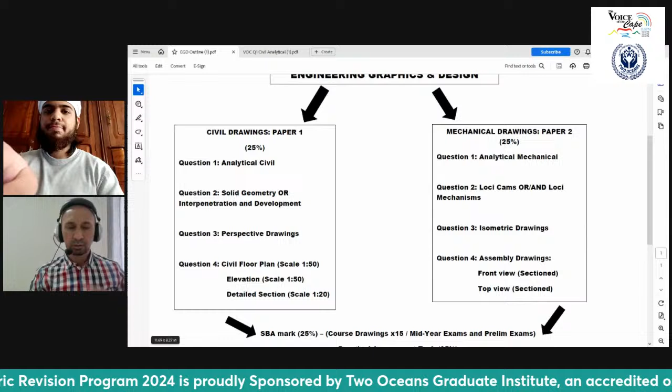Assalamu alaikum, and greetings to all our listeners, particularly the grade 12 learners of 2024. This is the continuation of a series of analyses of different questions from the Engineering Graphics and Design papers, which we are going to do over the next couple of weeks leading up to the final examination. So just to look at where we are at the moment.

Last week, I gave a very detailed analysis of what Engineering Graphics and Design papers are like, and we discussed question number 1, which is the analytical civil. Remember, for the next couple of weeks, we are busy with paper 1, and the analytical civil is part of paper 1. This week, however, we're moving on to question number 2.

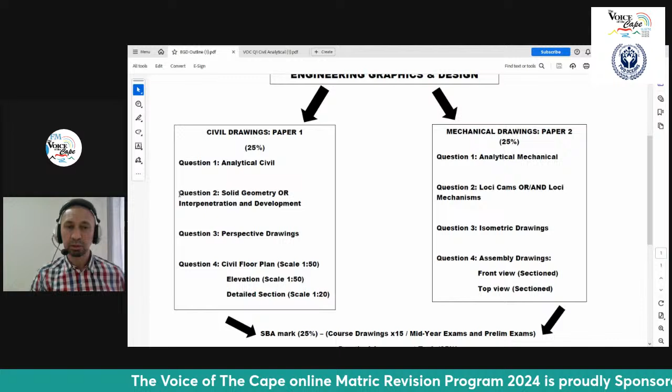But just before I get there, I want to touch on the last question of question number 1, which we did not finish. The bulk of this presentation today will be about question number 2. And remember, grade 12s, question number 2 can either be asked as a solid geometry or alternatively an interpenetration and development drawing. They will definitely not ask both, so you have to prepare for both to ensure that you are covered.

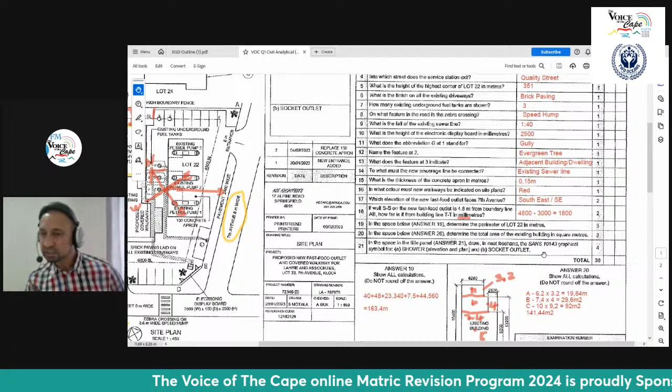Last week I worked out all the calculations of the perimeter and the area, and it was just this particular question, number 21. In the title panel, this is always the last question. You need to draw freehand the SANS 10143 graphical symbols for a shower, both the elevation and the plan, and also a socket outlet. Just to show you what those symbols are like, I want to change to my pen.

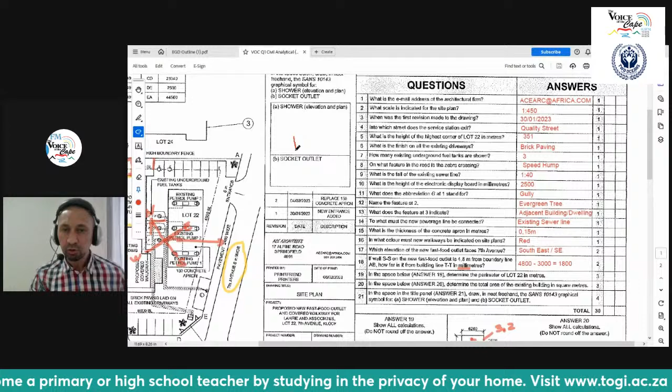The first one is a shower. The plan view of a shower is basically a square box with a little trap, which is a little circle. In any of the corners you can put that circle, and then you have the front view, or the elevation as we call it in civil, lining up. It has to be freehand because you actually get a mark for drawing it freehand. And then for the wall socket, you draw a semicircle, and then a line going straight up like that.

That is a basic wall socket. You do, however, get a switched wall socket where there's an extension of another line here and one down, but this particular one is the drawing and the symbol for the socket outlet according to SANS 10143.

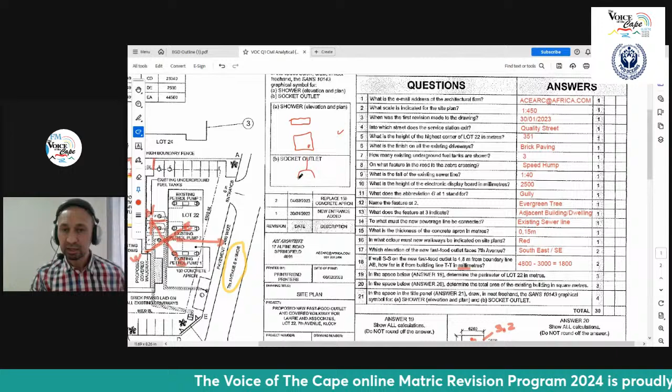Remember, if you do add a line here, the line cannot just be covering that section over there, because we are going to deduct and list that as an extra feature. It has to extend and protrude beyond that semicircle that you see there, that it's basically seen as the wall which you are drawing it against. Okay, so that basically covers last week's question number 1.

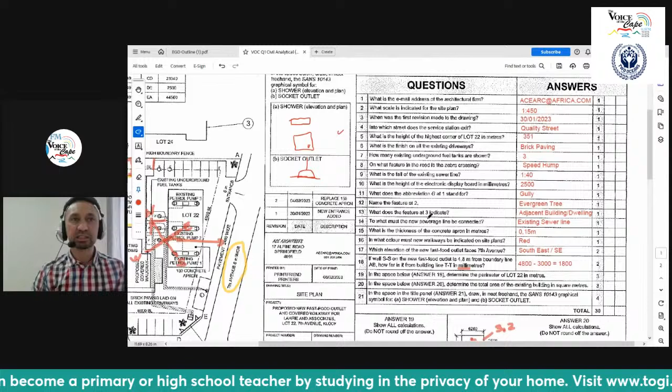So immediately I'm going to stop this here and I'm going to share my screen with the activity that has been prepared for this week. So let's just go there. So I'm going to look at a video which is the grade 12 paper 1 question 2 solid geometry, and I'm going to talk you through this video. I hope it's popping up now and that you can see it very clearly.

So just before we start, we have to analyze a little bit what is going on in this video, and I'm just going to pause that there and just read you the information here. And this comes from, if I'm not mistaken, the 2020 Matric paper, November 2020. So if you can find this paper on the internet, the DBE WCED website, download it, and you can do it as I'm going to explain it in this video.

So what it says here in the instruction, and it's very important for you to read the instructions. What is given is the front view, and that is the front view that you see here on top. And you see the top view, which is at the bottom here, of a right regular hexagonal pyramid, and there's the pyramid, a hexagon in shape.

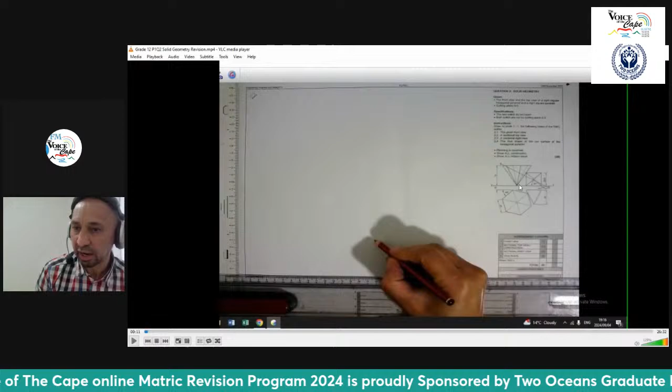And then you also see a right square pyramid, which is basically on its flat side here, pointing towards us, if you look at that front view, and that is what it looks like from the top. So the right square pyramid, both are pyramids, and the hexagonal one that you will see there. So those are given to you. And of course, also there's a cutting plane SS that runs through both.

The specifications are that the two solids are not touching. So it looks like it's touching there, but if you look at the top view, there's a little bit of a gap in between here. So both solids are not touching each other, and both solids are cut by the plane SS.

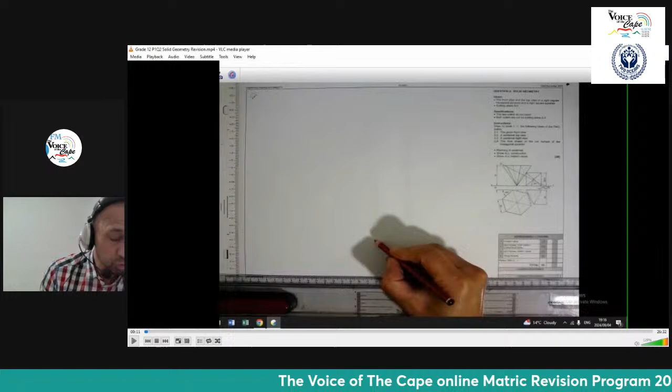The instructions are that you need to draw to a scale of 1:1 the following views of the two solids, and it's listed here 2.1, which is the given front view. So that view that's given to you there, you will have to draw that. But of course, you are going to start with your 2.2, which is your sectional top view, which is that over here. And then you are going to proceed to a right view, which is going to be on your left-hand side, because of this paper being in first angle orthographic projection.

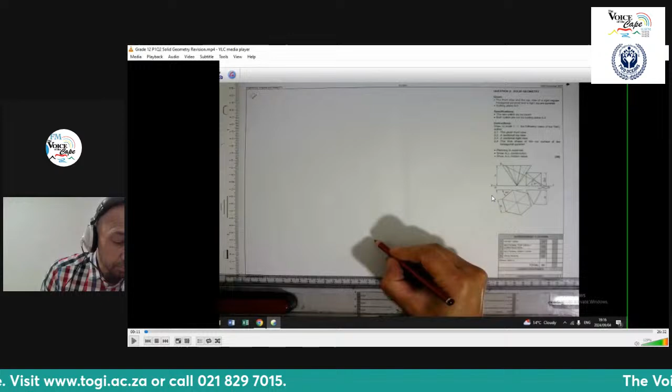And then, of course, 2.4, the true shape of the cut surface of the hexagonal pyramid. So only the hexagonal pyramid true shape you need to draw. What is very important to note is that planning here is essential: where you draw, where you start, so that you utilize all the blank space that you need to be able to complete the drawing. Then, of course, also construction lines are important, and all the hidden detail needs to be shown as well. All right, let's proceed and see where we are going to start.

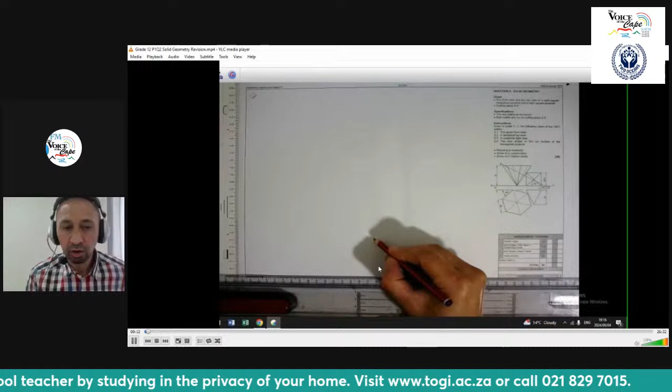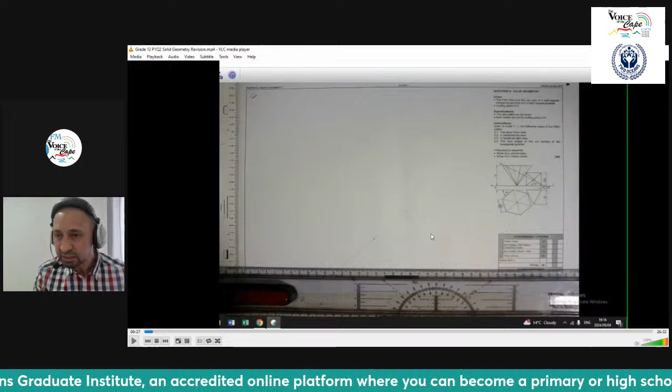So I have indicated a dot here, and it's towards the bottom of the page in the middle, and you can see that I've run my drawing across here to see what angle actually fits. And I have seen that the 45-degree set square actually fits that line, because there it states 45, and I've drawn this particular line that you will see here from my center point, which I've indicated.

And now I am going to look at the dimension of one side, and the dimension of that one side is 45 millimeters. And that also now becomes the radius of the circle which I'm going to draw. So if you are drawing this from a center point, you need to take one side and make that the radius of the faint circle, which is part of your construction. And you will see me drawing that faint construction over there.

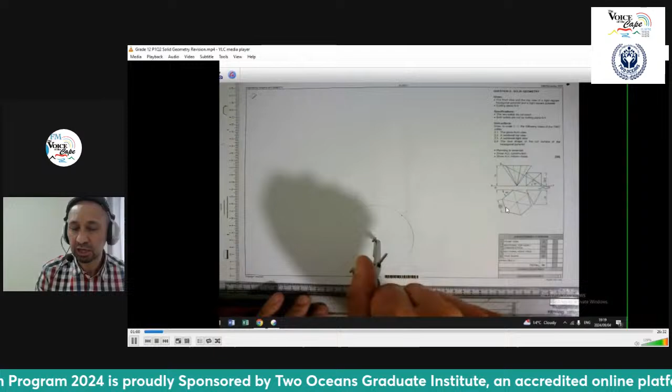And I will also identify the 2 points on the circumference of my circle. I maintain that 45 and arc it both sides of those 2 points. As you can see, it unfolds in my video. And by doing so, I'm actually creating the 6 different sides of 45.

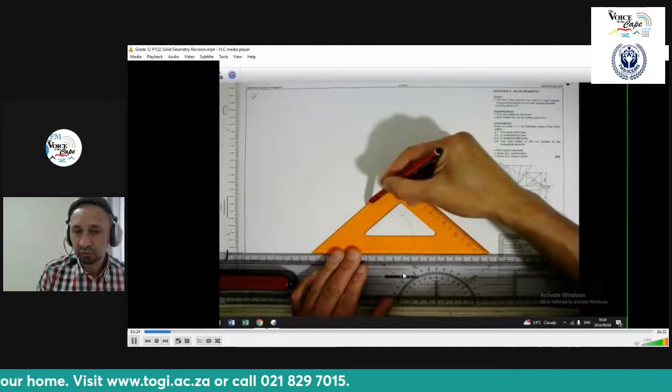So I'm going to connect the different points on my circumference. The first 2 would be those that are at angles 45, and then I can simply connect the other 4 angles by using my straight edge. Any straight edge would be your set square or your T-square as well. And there I have completed basically my hexagonal base part of my pyramid.

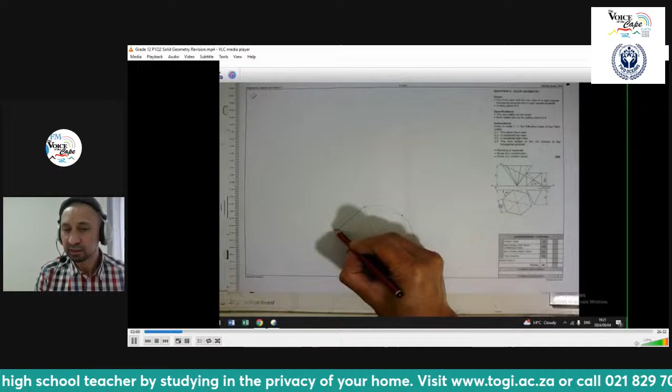I will project the lines across so that you can see that those are the lines forming my apex. It's upside down, as you can see here. That is why we have dashed lines in the middle here. What is very important, which you have to note, I've labeled my points, and you're going to need this: 1, 2, 3, 4, 5, 6. And you can start anywhere. It doesn't really matter where you start. I've started at that specific point. You can start at any point and run it either clockwise or anti-clockwise.

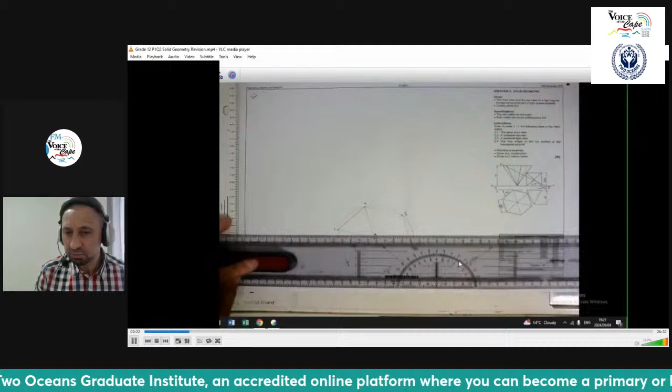So these points are all going to go up. But just before I draw it up, I'm going to have my XY line, which is going to be from this point here, which you see in your given. And that XY line will be 15 millimeters as I've measured in the instructions. Now that line is my XY line, right? That's the separation between the different views. And that is going to be the line that my apex is going to be situated on.

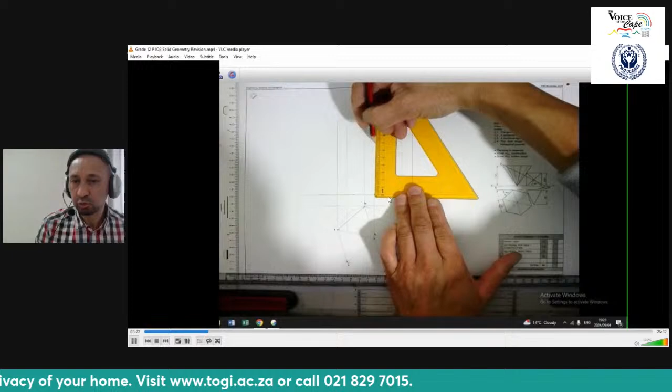I now will have to project all my points from 1 to 6, including my apex, up, right? And that is how I'm going to formulate my front view of my upside down hexagonal pyramid. Okay, and I will identify my points. That is the apex, which is right at the bottom on my XY line, and I have a height of 70 millimeters, which I'm going to measure off from my apex, and I'm going to draw that line there, and that line becomes my base. So that's why I'm going to darken that line.

And I will also indicate my different points. My point on the side here will be number 1. That will be number 2. That will be number 6. Then we have number 3. There will be number 5. And then, of course, number 4 will be there. And then you obviously know that all these points actually run to my apex as I'm projecting that. And you can take each one and run it to your apex.

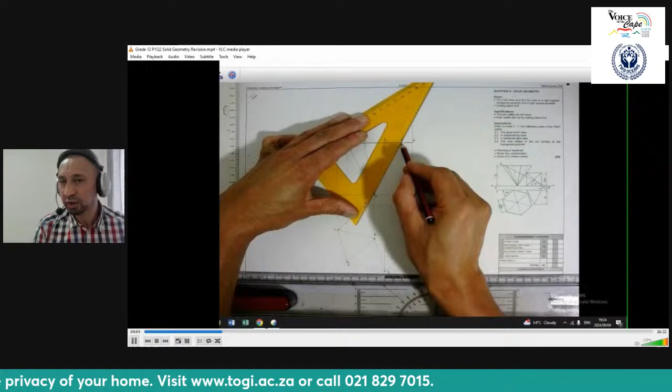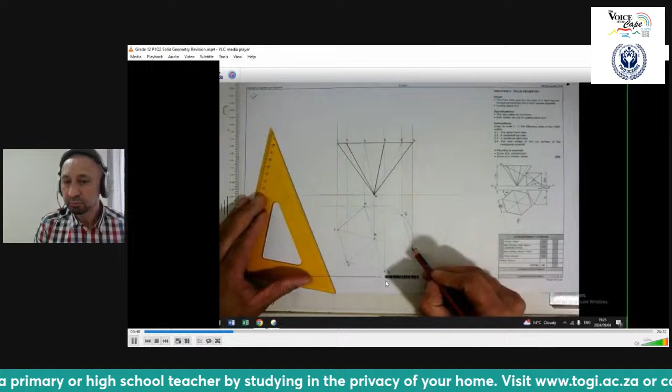Remember, I'm keeping it just faint because some lines will be dark, which can be seen, and others will be dashed. So I'm viewing this from my arrow here, which means that 1, 2, 3, and 4 will all be dark lines, and number 6 and number 5 will be dashed. The reason for that is because those are at the back of my hexagonal pyramid, as I'm viewing it from this point here where my arrow is indicated. So these 2, 6 and 5, will be dashed.

Nice short little dashes will allow you to get the mark there, as well as this one that you will see me drawing in the video right now. You will also pick up that I'm actually drawing this dark. What is my reason for that?

The tip that I want to leave you with today is that the view that has the cutting plane in it, or the cutting line in it, is the view that you can draw dark immediately. And this is a tip. The reason for that is nothing is going to happen to that view. That view is just an instruction and indication of where it's cut. So you can darken everything in this view.

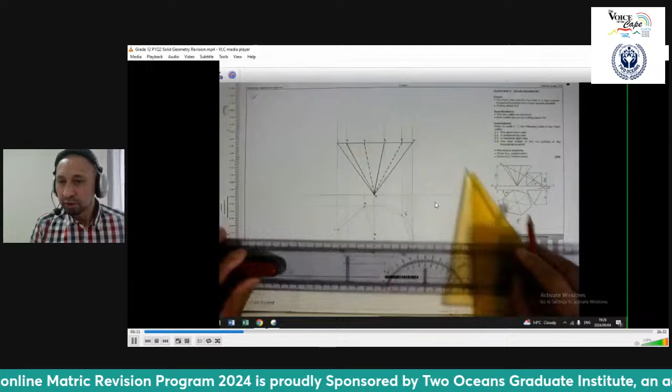These views, unfortunately, have to wait a bit because they have an impact from the cutting plane that will be in this particular view, both your top and your right view on your left hand side. So what I'm going to do now, I'm going to continue with this for space planning onto my right view on my left hand side.

But before I can do that, I'm going to create an XY line any distance away, or you can have it as 15 as well. But I've used any distance, not too far. So those are both XY lines, one perpendicular to the other one. Wherever they cross, you are going to draw a 45-degree line down, right? And that is for the projection purposes of my top view onto my right view on my left-hand side.

So now I will project all my different points, and you can start anywhere. I've used the last point at the bottom just to see where that fits in, and it just makes it onto my page slightly over the border. You will not lose marks if it goes over the border. And here you will see me projecting all 6 points from 1 to number 6, including apex, onto my 45.

And then what happens? It goes up, right? Because in that space, you will find my right view will now formulate from the different lines that I'm projecting. So as I'm drawing my lines up, I have my top here, which is my base, and I have my bottom here, which is going to be my apex. So I've just zoomed in a little bit so that you can see a bit more clearly how this unfolds.

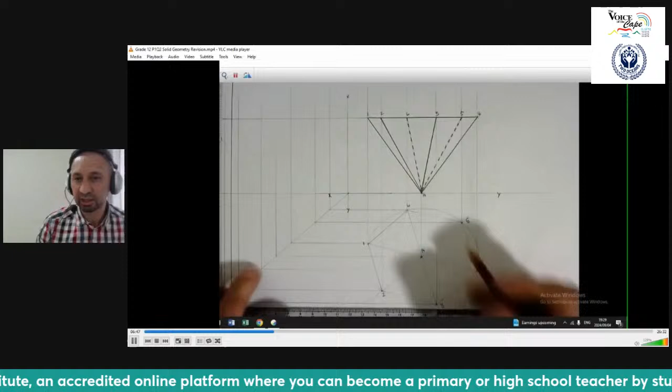I'm first going to take my apex, dot it, and you can see it's all about coordination of points. And I just want to stop. If you take this apex point and you trace it onto my 45 and up, it lines up with where my A point actually is in my front view. And the same will apply with all the different points. You will see as I trace them, I will label them as well.

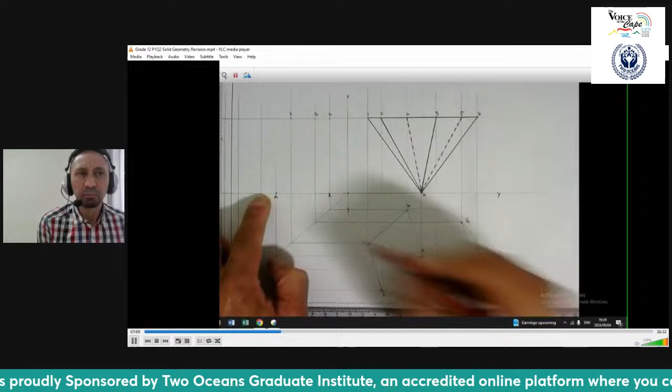And it's important for you in the exam to rather use numbers or letters, because it is a way of just ensuring that you understand what you're doing, and it will help you to get the actual cut that you need. So I've done all my points, and now I'm going to once again let them all run to my apex from 1 to number 6. I draw them all faintly first because I need to cut them eventually when I put in my cutting line in my front view. So there I've drawn that. Both of these views now are in faint format.

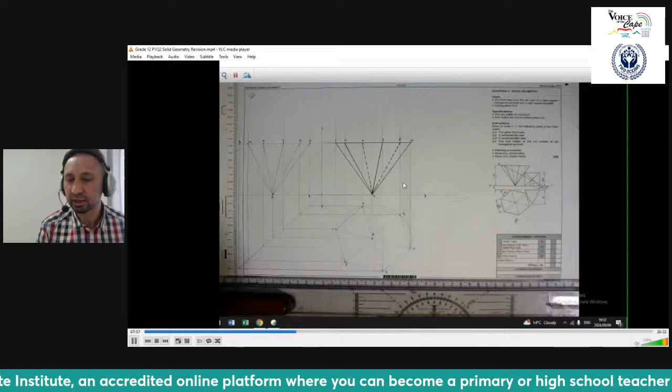Now I'm going to go to my second, which is my square pyramid. And I'm going to put in my square pyramid, and I'm only going to focus on my square pyramid now. And my square pyramid, I have to go up by 45. Remember, all sides of a square are the same. So I've got to go up 45. I'm going to draw a faint line. And because I know it is touching, that is my guide point there, where it just links up with my hexagonal pyramid. I bring that down.

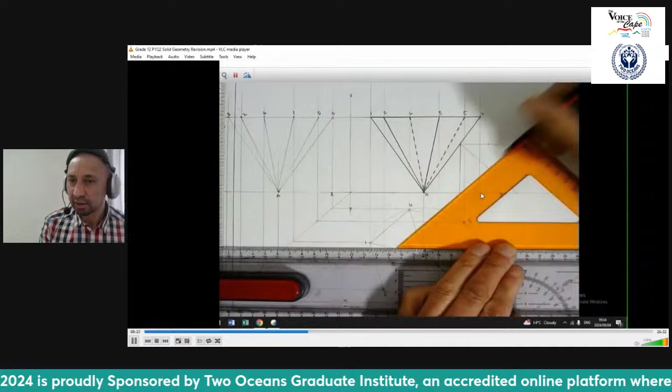That's my one side. I'm going to cross this over as it is in my given view, that way, and the other way, which is my crossovers forming my apex. And because it's in my front view, as I've mentioned, you can darken it because this view doesn't contain the cutting plane. So I'm darkening that, nice and easy, clear, concise lines, and crossing it over for my apex. So there are my inclines. We'll see there, that shape faces us now.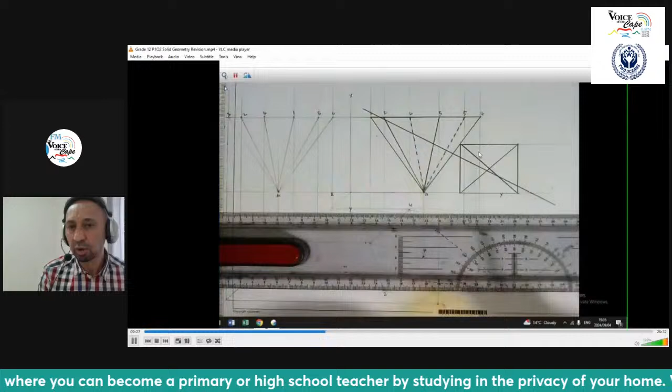And now, to put in my cutting plane SS, I'm going to measure 10 millimeters away from this edge as per instruction, dot it, and then use an angle of 30 degrees as per my instruction from that 10 dot or the 10 point, and run a nice dark line through that. Once I've done that, I will label it as SS, because you do, however, get marks for putting in the cutting line and labeling it correctly.

Now you will see, learners, that this actually cuts perfectly at an incline through the hexagonal pyramid and the square pyramid as well. And for you to be able to see what the shape looks like here is sort of the higher order part of this question. Let's proceed.

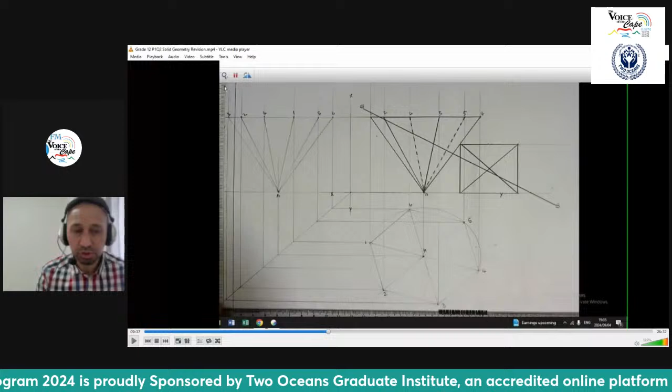So we're first going to cut one at a time. So I'm first going to do my hexagon, and for this particular exercise, I'm using a red color pencil, but remember, pens are not allowed in engineering graphics and design. Pens are not allowed. You're not allowed to use a pen, but you may use a clutch pencil with color.

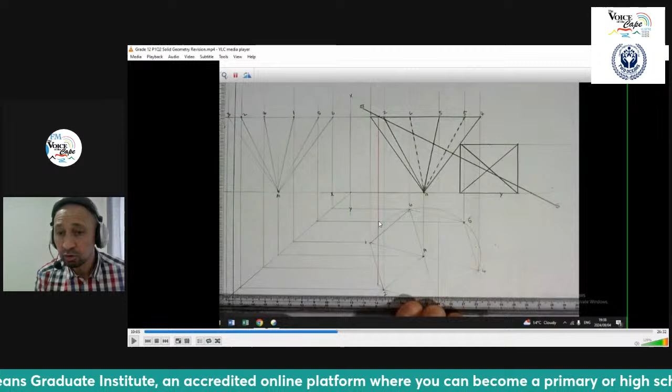Now, and I just want to point out this, everywhere the cutting plane cuts on these edges that go up, or come down, should I say, right? That is where I dot it, and I'm projecting with my red color pencil those down onto this top view. Let's see how it goes.

Right, so I've done this one here, and you will find significantly that that one cuts through the base. Now, once it cuts through the base, you must know that it cuts through 2 points always, like I've indicated there. Let's proceed. And then I cut through that little nip of a line there on 2. So I will bring my line down. Wherever 2 is, this is 2 to my apex, and I will dot that exactly there, very close to the end. That way it's cut.

Right? And then we will move to number 6. It cuts on number 6. And you will see that that's 6 to A in your top view. Wherever it crosses this line, 6 to A, that is where you're going to plot your point. And then we're going to go to number 3. Number 3 is cut on that point there. I bring it down. There's my 3 to A, and I plot my point there.

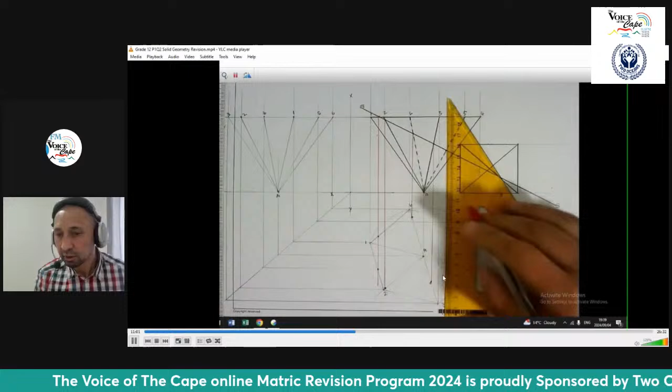Then I'm going to go 5 to A, and 5 to A will be on that specific point here, you will see. And finally, the last one is 4 to A. 4 to apex will be just there. So that is why your numbers are important, so that you know where to plot your points.

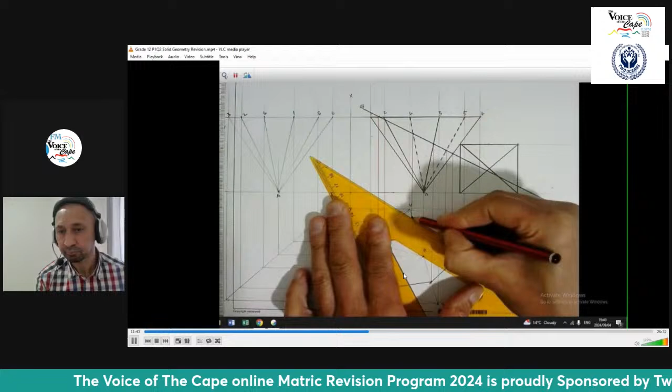And now that I have that, all I'm going to do is connect those in sort of an irregular shape. And that irregular shape is this part here. Now, that part has been cut, of which this has been removed. Right? So there I am just connecting that to formulate that shape that you see there.

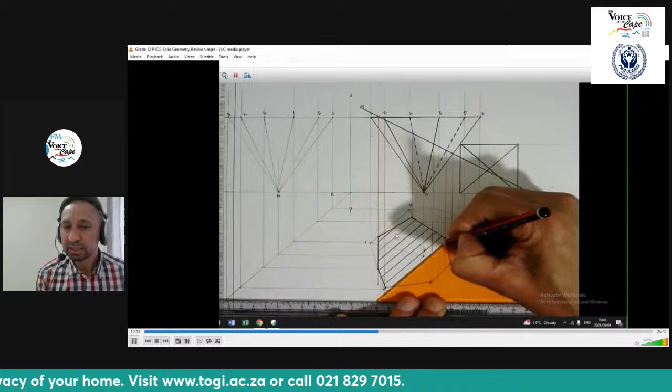And by means of showing the cut section, I am now going to take my set square and do my hatching or sectional lines at a particular angle. The angle can be 60, 30, or 45, doesn't really matter, just so long as it does not go parallel to any of the sides here, right? This one is slightly not parallel there, but that would suffice for that cut.

Now, when I say that part has been taken away, that little part still remains there, so that edge you're going to see still; that is the reason why I'm putting in that part over there. And then, of course, everything still runs down to my apex, which means they will be there but cannot be seen from the top. That is why I'm adding my dash lines, hidden detail lines is the proper name, from all my cut points to my apex. Because I'm viewing it from the top, I cannot see these corners, hence they are drawn dashed.

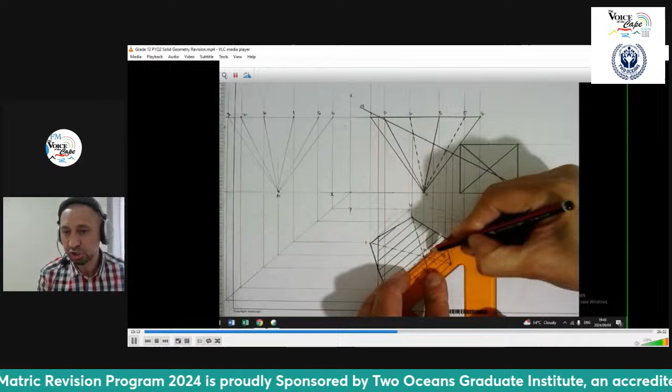Okay, so that completes that part there. I'm now going to do the cut immediately onto this one, and then I'm going to come back to that one over there. So now, in a similar fashion as I've done on my top view, I'm going to project all my cut points onto my right view on my left hand side.

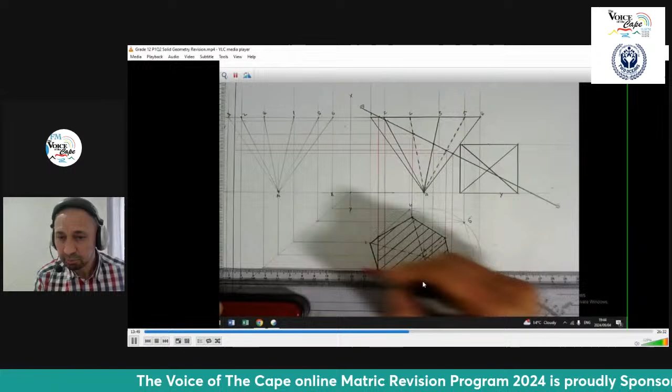So you will see I do number 4, number 5, number 3, number 6, number 2, and then I don't know where this is, right? Because it's somewhere here, but I'm going to take the two base points, and this is important, the 2 base points, I'm going to take onto my 45. It's still in red because I'm busy with my hexagonal pyramid, and there I'm bringing those 2 base points, and I just want to pause it right here.

My 2 base points, I don't know where I can find that down here if I just project it over. These ones I can find, but the key here is to ensure that you have the 2 base points here projected onto the 45, and you will have it there. And you will see that I start by drawing that dark first to identify that, okay, on my base. So that is my dark section there, which is that point over there.

And now I'm going to connect the other points. So 2 will connect with where 2 is. So this is 2. So I'm going to have a point plotted there. Right? There's my 2. That is where my 2 is. And you got to trace where it is and plot it. Then I'm going to go number 6. Number 6 is way on this side here. That's where number 6 is. Then that is number 3. Number 3 is going to connect with that 3 over there.

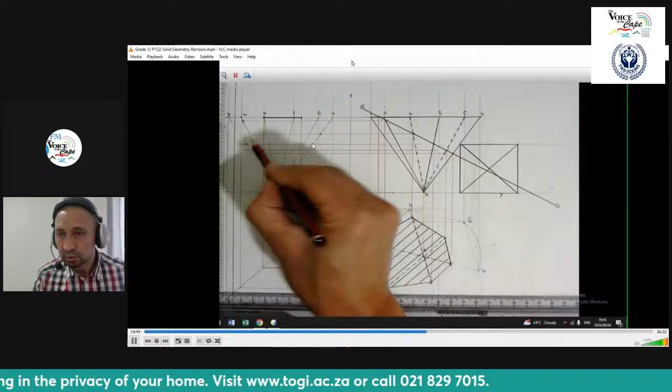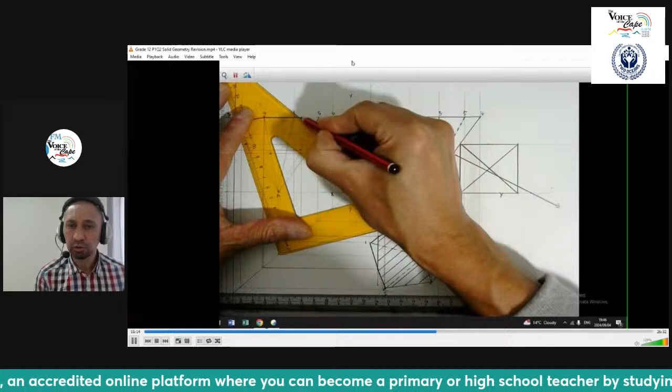Number 5 is going to be where number 5 is right here. And number 6, which is the last one, which is right at that point over there. Sorry, not number 6, number 4. That is number 4 that I'm busy with here. And then I just, once again, connect all my points so that it forms that irregular shape, which means that that is, in fact, the cut section. Okay, so there I will do my forming of my cut section by connecting all my points in that irregular shape that you will see there.

And now once you have completed that, in the same way that we've done the cut hatching, you are going to take your set square and your T-square and do a hatching. And here I can choose any type of slant. In this case, I have chosen the 60 degrees on my set square to be able to do the hatching presentation of the cut section in that view there. Nice even spacings that you have so that you can get the full mark for that.

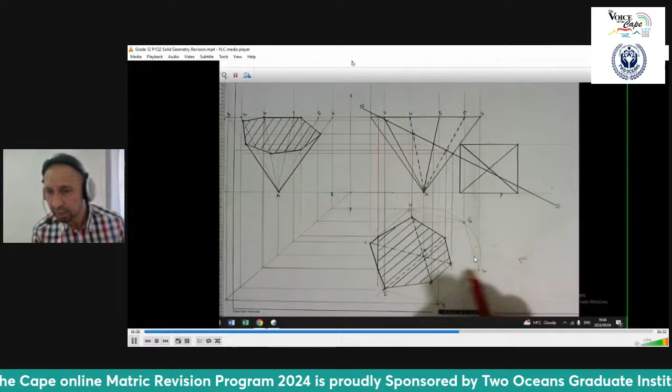And now I'm going to ask, if I remove that and I view it from this side, this bottom part will still be there. So I have to draw that in. All these points will then go down. But keep in mind, that point will be dark. Number 6 will be dark. All right. Number 5 will be dark as well. And number 4, because I'm viewing it from this side, number 4 and 5 will be dark. Sorry, number 4 will be dark, as I can see there.

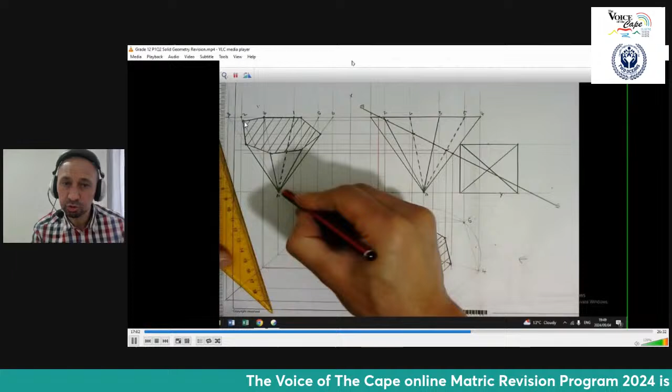I view it from this side. Number 5 here will be dark. I view it from that side. But number 1 here will be dashed because I can't see it. Right? It's on the opposite side. I know the corner is there, but I can't see it. And then also number 2 is on the opposite side. Number 2 will be dashed as well, which indicates that the corner is there, but I am unable to see it. And that's why it's dashed.

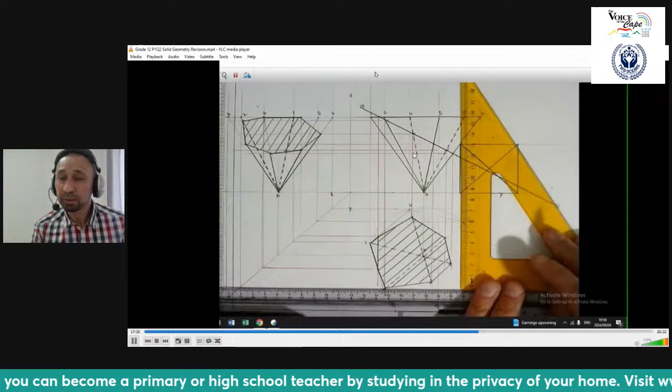Right, so that concludes that part of my drawing, which is basically just focusing on the hexagonal pyramid. Right, now I'm going to draw my attention to the square pyramid, and I project these lines down as it is in my given. It's in line with that point over there. That's the back part. And then it slants to my front or slants to my apex.

So I'm going to darken this line first, which is my back point. And I know the front part is going to be 50 millimeters according to the instruction, and there I'm drawing in my 50, nice and faint. Right, I'm not going to draw dark yet, as there's a cutting line that goes through it, so I need to find the cutting line or the cut section first. So the back section you will probably draw dark, but that point there will be now identified on this line here, and you will see me drawing in green.

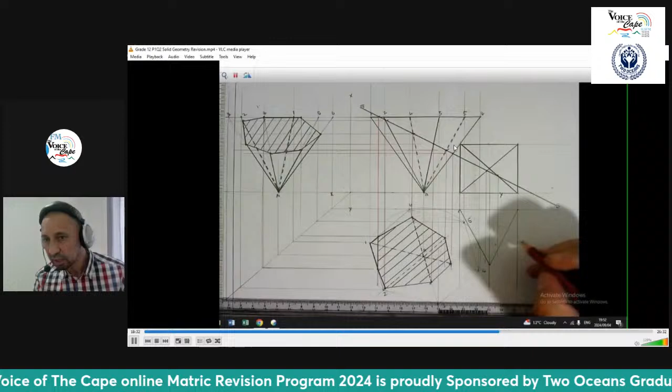So these points that cross here, that is where the cut section is, right? So it cuts from this side to that point here, to that point, to that side again. So I've identified those 2 points, as you can see, and now I'm going to darken all the section till that point, bring it slanted across, and reverse it to that point again. There you will see the slant up until that section there.

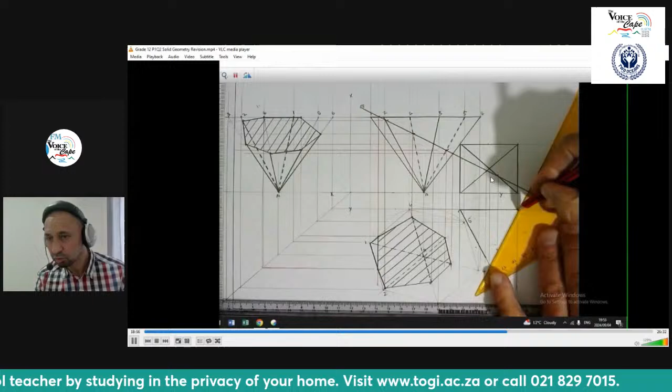That one goes onto that point over there. That's where it cuts, and then it just goes across. And that is the cut section of this square pyramid. Now I'm going to hatch a different type of hatching, opposite direction perhaps this time around, to ensure that you show that these are 2 different things or different shapes that we are busy with.

Nice even spacing, evenly apart. What I need to do is to check. If I take that away, that's my cut section. What remains, right? The tip part is not there anymore, so that just remains faint. That is the only part that you will be able to see.

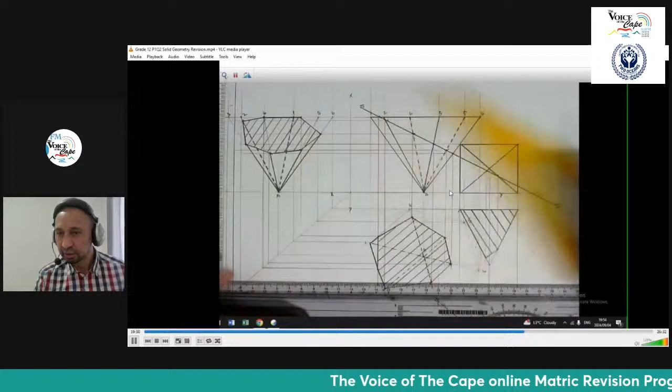Now I project over to my right view on my left-hand side, and I take the whole shape, the front part, the original apex part, take that up, and it connects with this apex coming across here. So I first work with the original. So now I have to identify where is that according to my lines. So the back part is here, and the height is there given to you.

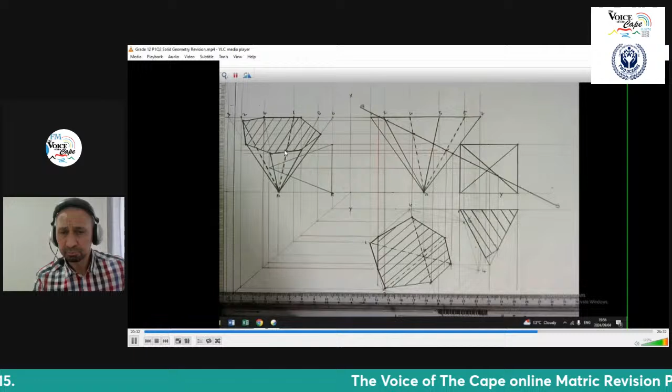That's my height, right? And then I'm just faintly going to draw in that back part there of my square pyramid, and then it slants to my apex, which I've identified according to the top and the front view. Faintly I slant that. So this is going to take preference in viewing over my hexagonal pyramid, so I will have to erase that part later, but I just want to show you where the cut section is done here if you view it from this side.

So if you project that point across, and that's at the back, so you're going to have to plot a point there, that's at the back. This is on the one slant, and you will see wherever it crosses on the one slant, there you're going to have a point, and this crosses on the other slant on the other side, but the same line, so you're going to find that point crossing there.

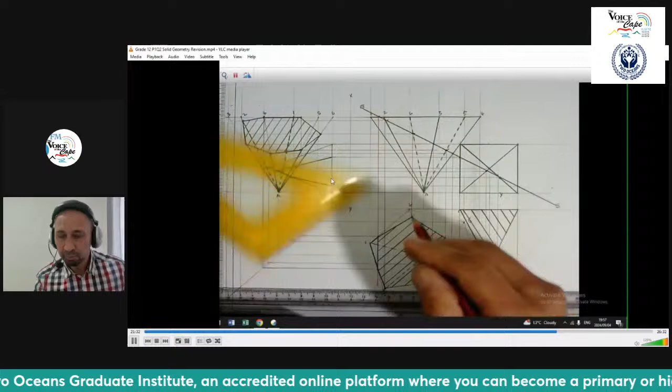Okay, so it's just a matter of line crossings, and then that will be at the back as well, which is here. So you have your 4 points, these 2 at the back and those 2 on the slants. So you're going to connect them. That one goes there, that one goes there, and that one slants till there, and then obviously the back part. So we only have the cut section now. Here's the cut section. That is where the cut takes place.

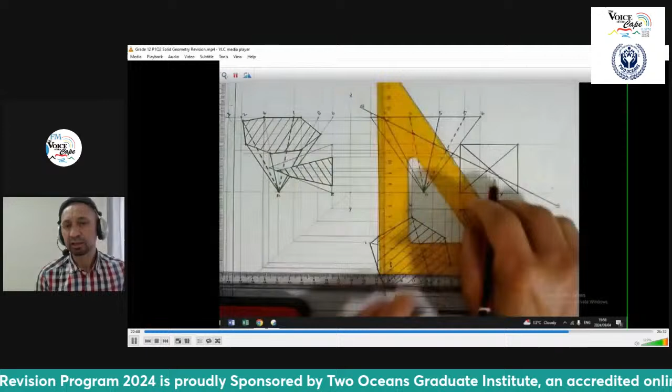You're going to hatch it again, evenly hatched lines going across. Right, you will see I have to erase that because this square pyramid takes preference, as I said, over the hexagonal one. And just to bring in those lines again, we have erased, and that falls behind. That's why you will see me erasing that part.

That is what's gone. What is remaining? That bottom part remains. So you are going to see that little part at the bottom there going to the apex still, which is this little section that you see there.

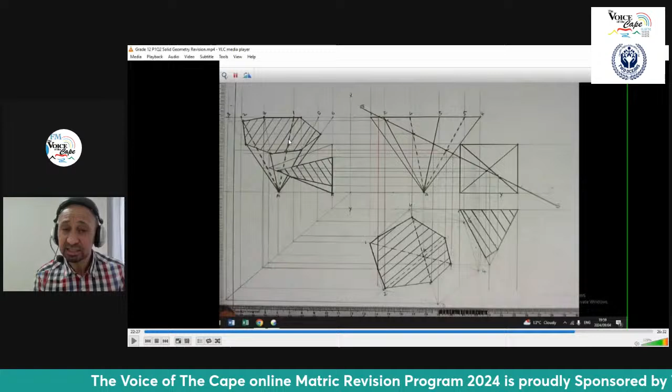And learners, if you look at that, you have now completed 2.1, 2.2, and 2.3. Both solids, which is your hexagonal pyramid cut in your top view, as well as in your right view on your left hand side, as well as the cut shown in your square pyramid, both in your top and your right view on your left hand side. And you can see strategically I've planned it according to my lines where I've done the cutting.

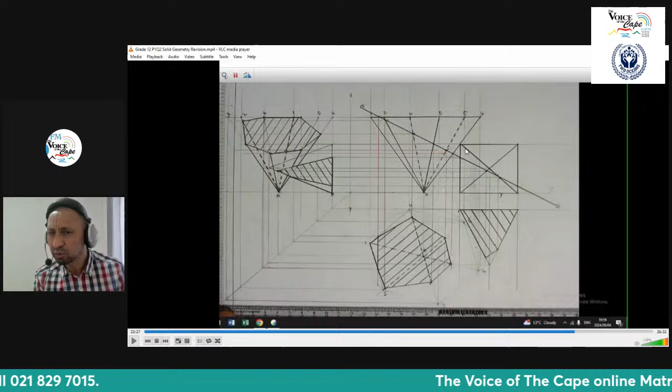Wherever it crossed, I plotted the point, I connected, I hatched. So it's very important for you to understand and for you to work with numbers. This was quite straightforward because I didn't use numbers here, because we only had 4 sides and it was just placed in a position where I could easily get the cut section. But it's a little bit more tricky when it comes to pentagonal shapes or hexagonal shapes. When it's upside down like this, I would advise grade 12s to use numbers or letters for easy plotting purposes.

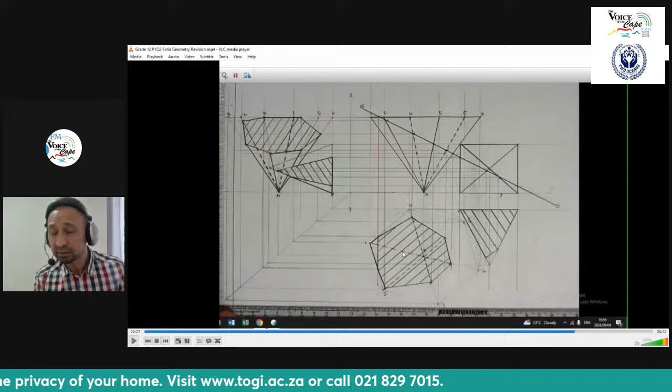Right. So the only thing that's left is for you to do 2.4, which is very quickly, and you will draw the true shape of the cut section. So this here is the cut section of the hexagonal pyramid, but you need to draw the true shape of that. And this is not the true shape. It's sort of on a slant. How do you draw the true shape?

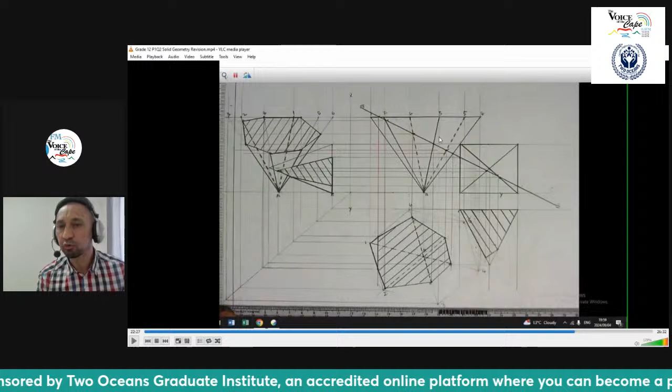You're going to find space here, up here, and there are 2 methods that you can use to draw the true shape. The one that I'm going to use is what we call the cone generator method, where you arc, but of course you can also draw lines at 90 degrees from this cut line. Let me show you. It doesn't matter which of the 2 methods you use. Both will be rewarded as marks in the exam. So let us see what happens next. You will find that you need blank space to be able to do the last part.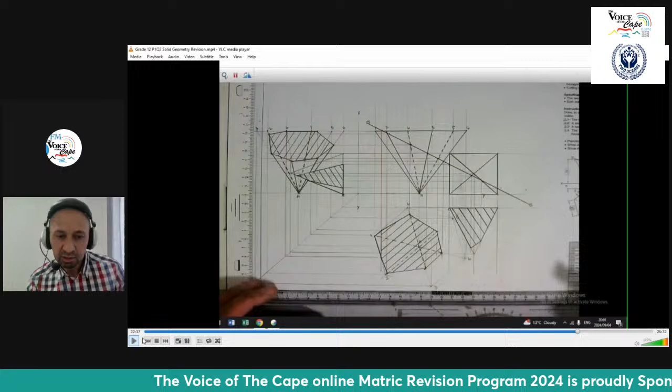And this is important. You are going to take this section here between that cut point there and where it stops here, and I want to just come back to what I did. You're literally going to take your line and put it up straight here. So these points are all going to be taken onto a straight line here. So I've drawn this line straight. That is the lowest point. I've drawn it straight, right? And that is this point over here.

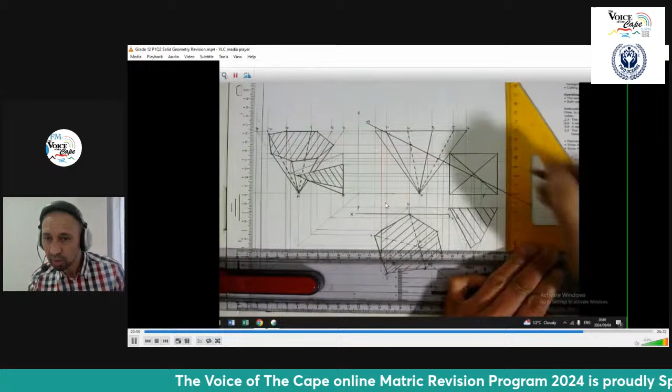And I've also drawn a line against the closest point here, which is my XY line. I've dropped it till there. And now I'm creating another XY line here. Now these 2 are speaking to one another. In fact, they are the same. Anywhere here, I'm going to draw this XY line, and I've dropped this XY line against the closest point, which is there. So, like I did with my pencil, I'm going to bring all these points up until this line over here.

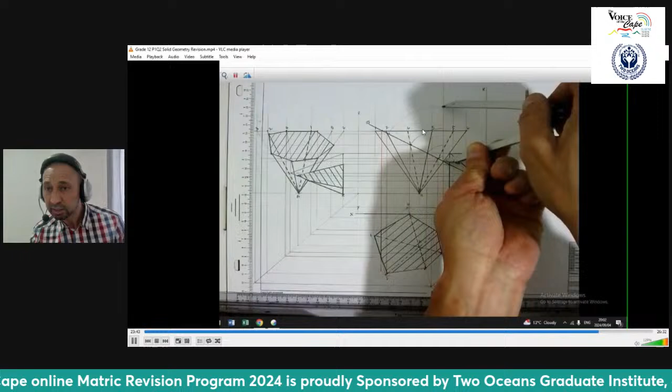And what do I do? I use my compass, and I go to the smallest one. My smallest distance, I just arc onto that point there. That is a point now. I go to the next one, which is number 3. I arc there. I go to number 6. I arc onto that line. And I go to number 2. I arc there. And then, of course, my base, I arc there. Now, I just want to stop there.

You will see I've taken this piece of line and drawn it straight up here. I've drawn this lowest point straight here because that point, which goes straight, is actually this point over here. If you trace it, you will see. And I brought all those points up onto this line, of which this point is there already. That's why there's no arc. So you will see it is number 4 that's existing on the line. Number 5 I brought by arcing. Number 3, number 6 I've brought by arcing. Number 2, and of course the base.

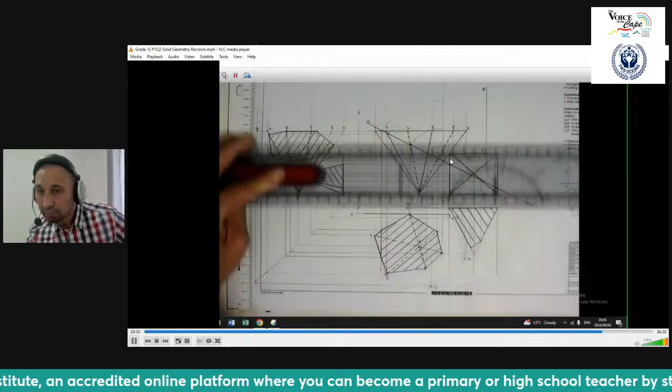And now what's going to happen is that I've extended this one already. I'm going to extend all these points now that way. All right, and that's all my numbers. This is the only point here that will have 2 plottings on one line. All these others will have 1 plotting. So what is it that I'm going to do? I'm going to measure down here and plot it that way.

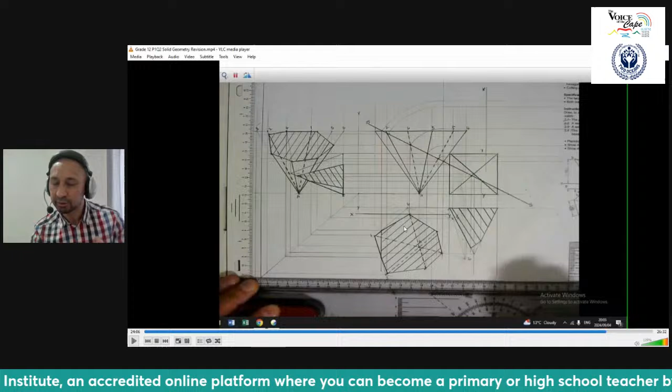So this 4 here, that's not 4, sorry. This 6 is my closest point. It's actually on the line. I can take this 6 and just make sure that I plot it on that point. And you will see the pattern that I'm following. I measure down and I use my compass and I arc it that way. So just watch the pattern, what unfolds in this drawing. I'm going to start with the closest point, which is number 6, and I'm going to follow and trace it.

Where's number 6? It's on the line because these two XY lines are the same. Then I'm going to go here to number 1. Right? Not number 1, but the cut section of my base. That's 2 points. So you'll see I arc it there and I go back here and I take the furthest point with my arcing. You can see there, furthest point. And I go back there from the same point I arc there. That's now those 2 points that you will have here and there.

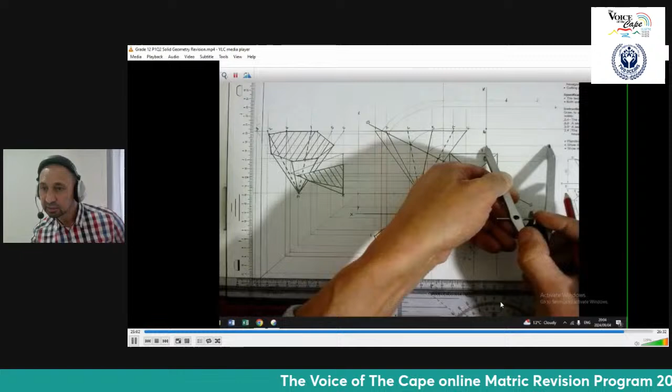Then I'm going to take this point, which is my furthest point, and I'm going to take it across and away from my XY line. So I measure away this side and I plot away that side. I take this point, I have that point already, number 6. That is my size, and I plot that size on that side. And then I go with this one over here. That is my size, and you can measure it as well. You don't have to do it like I do. You can measure it, and I'm just going to plot it where it is.

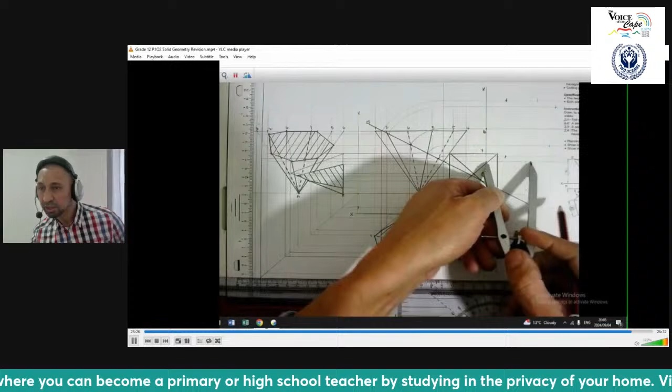And the last one is going to be this one over here, where you see I measure every time away from my XY line and then plot it away from my XY line there. And then all I have to do now is connect the points like I've done previously. And I start at a specific point and go right around connecting my points. And you will find significantly a hexagon has 6 corners, but here are 7 points. Why? Because the base has 2 points, making it 7, 1 extra one.

And there you have your true shape. That is your true shape indeed. And all you need to do is to find an angle for you to hatch that at a specific degrees. Doesn't matter which, 45, 30, or 60. And make sure that you complete it like that.

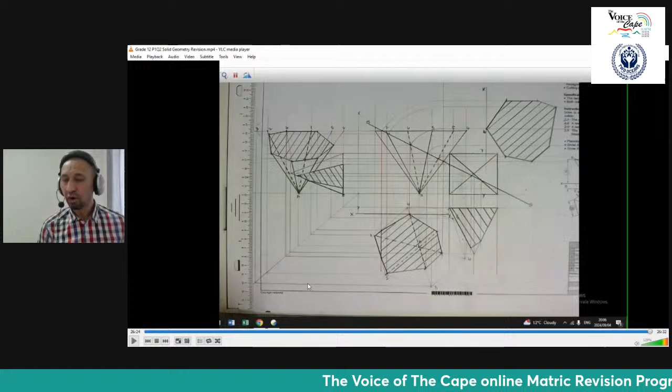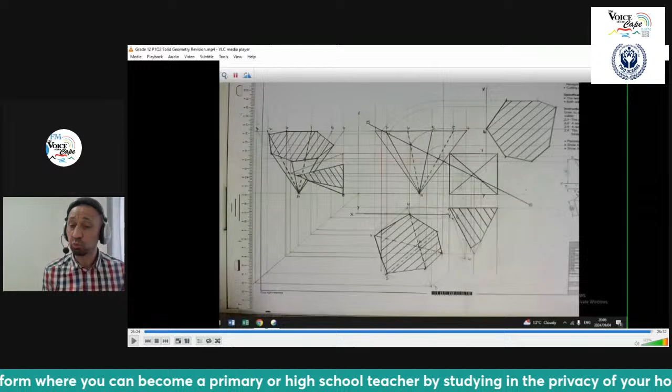And that, my dear grade 12 learners, brings us to the end of this particular question, which can be asked in your final exam at the end of the year. Prepare well. It will always be front, top, right or left, and a true shape of 2 solids, of which they will be pyramids, or they can be prisms as well, but there will be a combination of 2. I want to wish you all the best with this question. It's paper November 2020. If you watch this video, please try and draw it out and follow the video to the letter to ensure that you can attain the benefit of what we have discussed this afternoon.